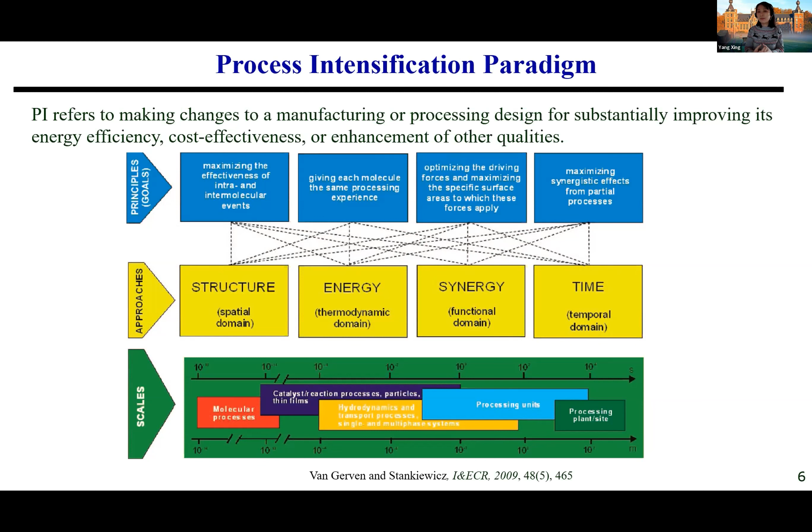Our membrane research is actually sitting quite perfectly along the full scale of the process intensification scheme. From the approach point of view, we also look at the structure, the energy, and synergy between different parameters, and the time as well. This describes very well how we could do membrane-based research.

So what do we do in KU Leuven, our group? We work for HER, which means health, environment, and resource. Basically we focus on fractionating biomolecules, such as antibodies, that can be used as a therapeutic solution. That is linked to the health solution.

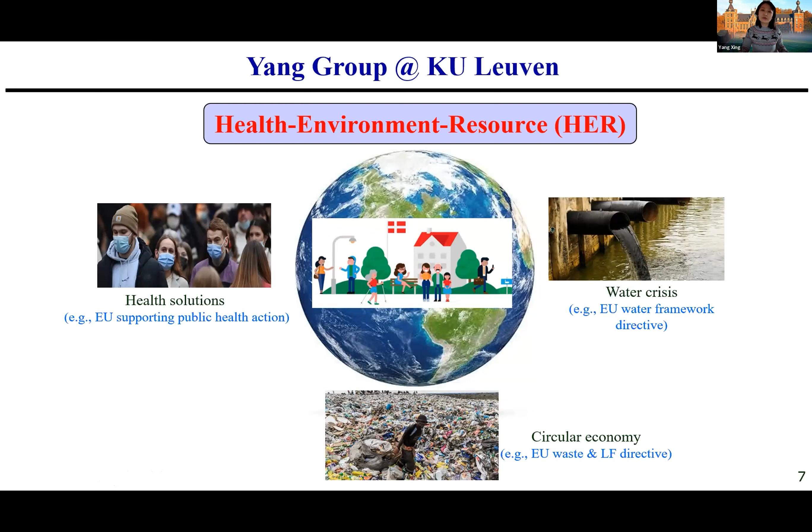We also look at water purification that can help resolve the water crisis issue, recovering valuable materials from there — we are very strong on circular economy. That is also part of the efforts under SIM Square, as I mentioned. We recover battery materials, which is eventually what our efforts are working towards: making our Earth a better living space.

Our research is covered under two umbrellas, two strategic directions in Europe: bioscience and environment, and matter, materials, and energy. We basically use this multi-scale process intensification for system integration and optimization.

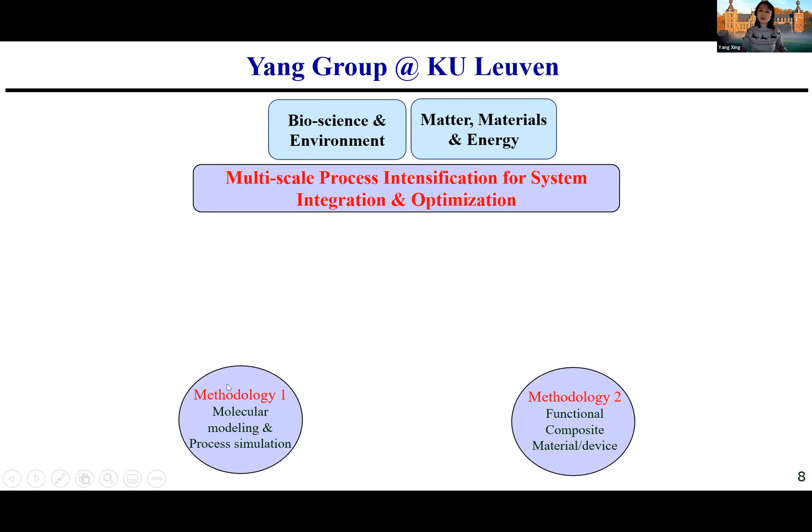We base this on two methodologies, or two toolboxes that we use. One is molecular modeling. Second is looking at the functionality and design, using the functionality of composite materials to actually design a membrane, and also design the separation devices to make them run more efficiently.

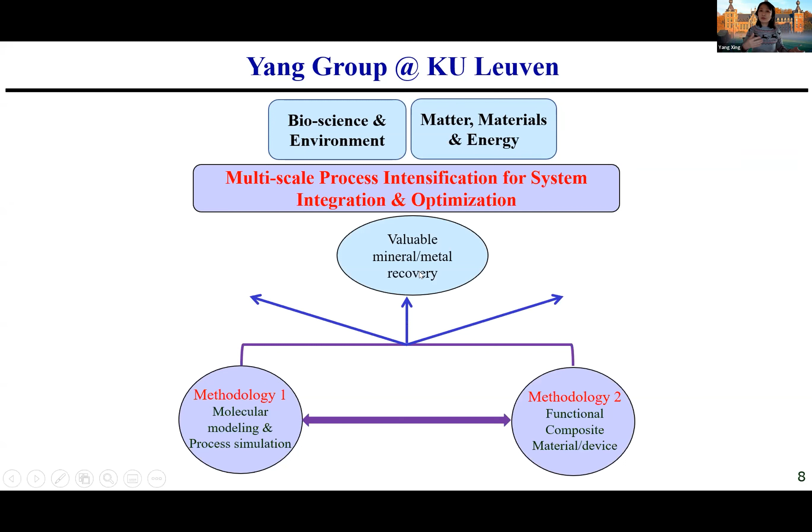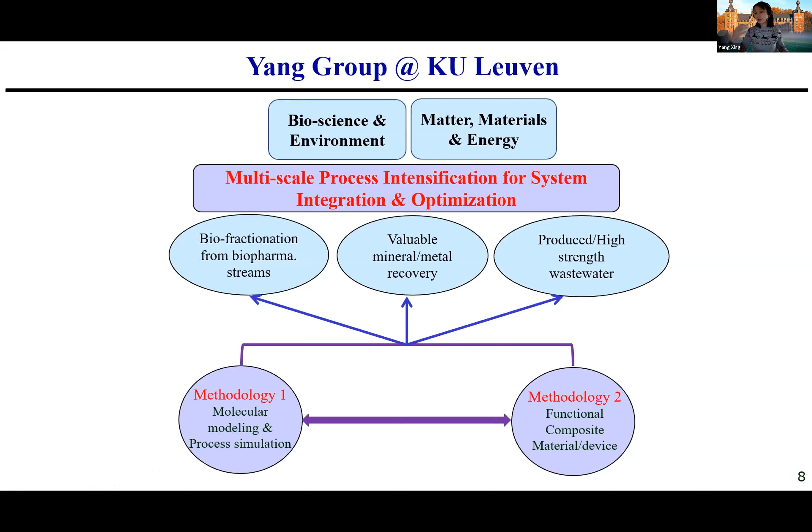So we focus on three clusters, and the first cluster is recovering valuable metals and minerals from natural and waste sources, which I will go a bit deeper. We also look at fractionation of biomolecules from biopharmaceutical streams, and we focus also on high strength wastewater. That again is linked with resource recovery. So we not just focus on purifying the water, but also recovering the values from there.

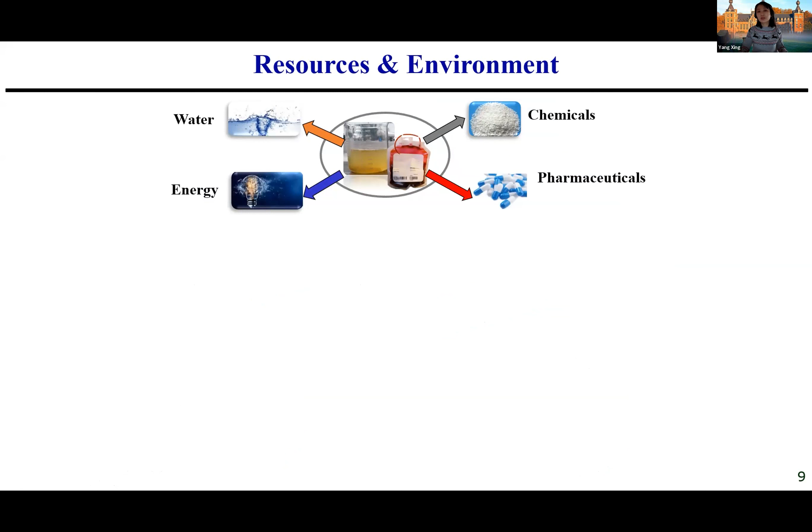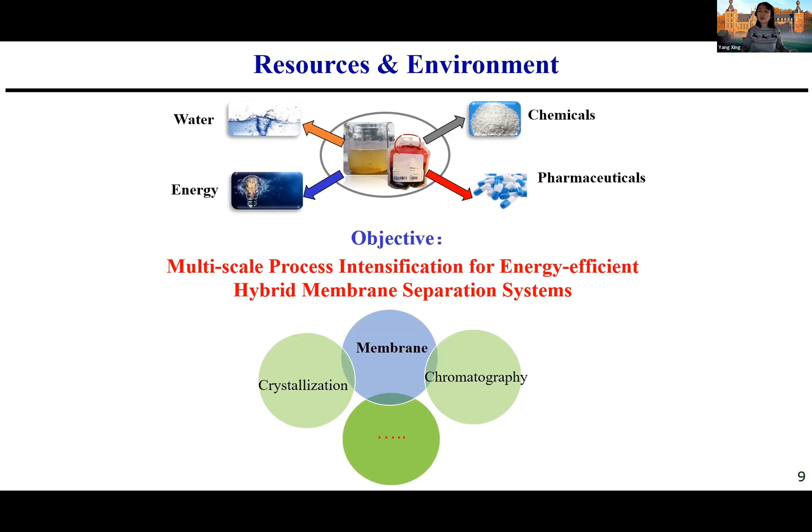As I said, our objective is to use process intensification to see how we can design more energy efficient hybrid membrane systems. As a chemical engineer, we also would not forget about other classical chemical processes. We will hybridize the membrane concept with the concepts of crystallization, chromatography, adsorption, extraction to achieve the separation and eventually achieve purified products. So how do we do that?

Basically, if you look at from the micro to macro level - on the micro level, what we do is use transport modeling to understand what is happening when the solutes transport through the membrane, what the membrane chemistry and surface chemistry is doing in the separation, and also how the micro level hydrodynamics is affecting the micro level transport. So we understand what are the limiting factors in the separation.

We also look at functionalization of the membrane to overcome low effectiveness, and the kinetics and dynamics that affect long-term separation, long-term performance of the membrane. So combining the understanding on those two levels, we can design really efficient membranes, combining the membrane functionality and also the flow dynamics.

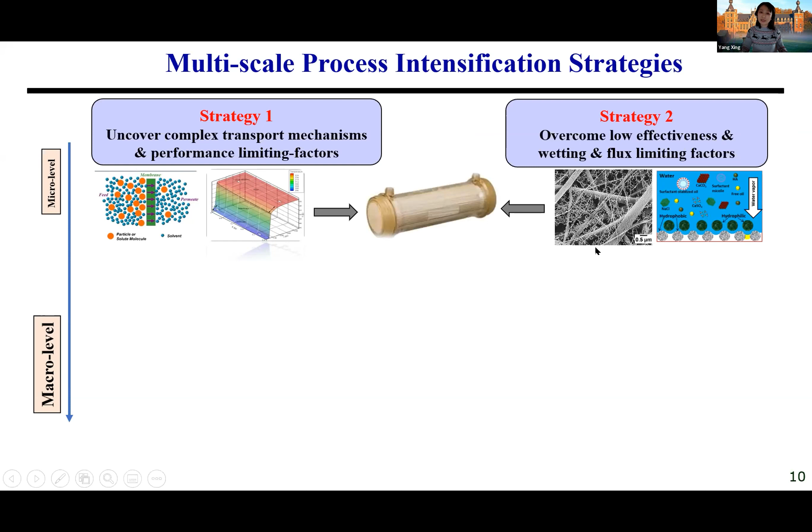On a higher level, we also look at systematic analysis using process simulation to actually design a system that can overcome low energy efficiency and eventually achieve the design of a larger scale system.

As I mentioned, we have three clusters in the group at the moment. So the first cluster is looking into the fractionation of biomolecules. We're looking to purify not just their bioactive components such as antibiotics and proteins and viral vectors, but also harvest them as crystal products. Our strategy is also around three pillars, what we call.

So we look into how we can design the structure, because bioseparation is very different from ion separation - we need very porous structure. We look into the synergy of the structure and the surface chemistry, where we can design very accurate capture and release of the proteins or the biomolecules.

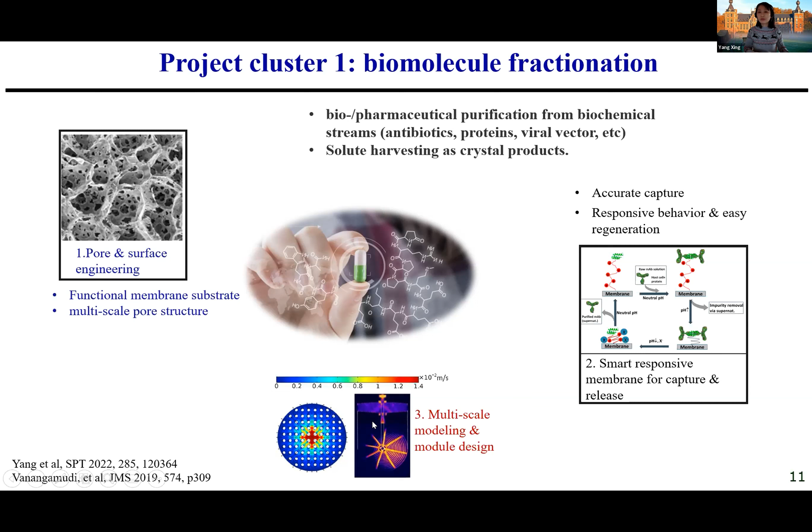And we also build transport models to actually look into what are the most influential parameters, and how we can design the structure of the membrane, the surface functionality, and also the module to achieve the most efficient separation. So these are all very influential factors that we identify.

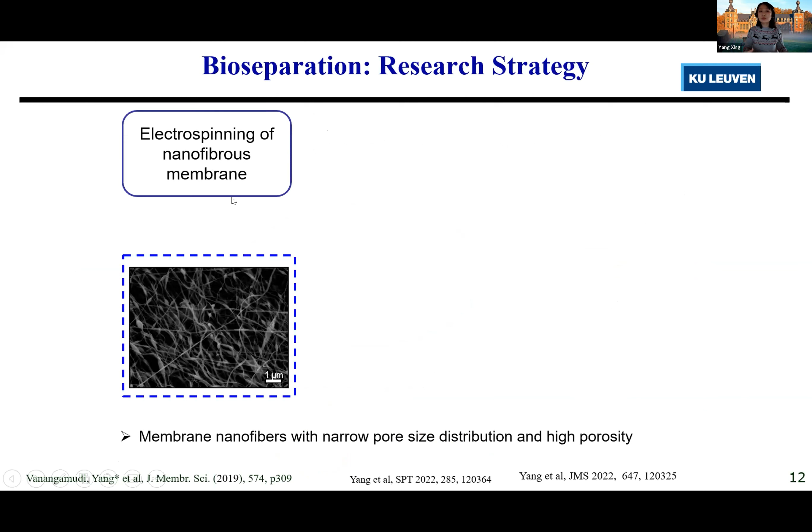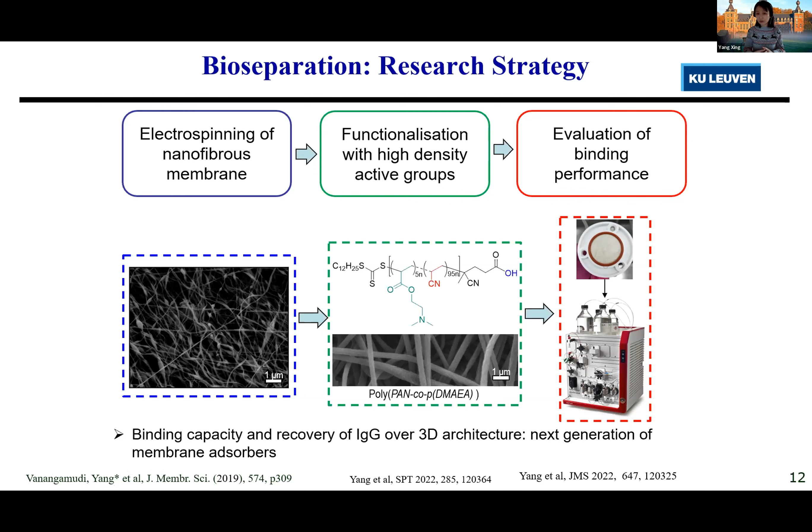So what are our research strategies? In bioseparation, we focus on nanofibrous membranes. We electrospin these membranes and functionalize them to have very high density of active functional groups. Then we also evaluate them in terms of the binding of the membrane towards the bioactive compounds. Our aim is to develop this new generation membrane that can have a 3-dimensional structure with very high binding capacity, which is the current limit.

As I said, we use electrospinning - that's our facility. The reason we use that is because it can be very versatile in terms of tailoring the membrane, not just the hydrophilicity or hydrophobicity, because we need a very hydrophilic surface in this case. We also need very high surface area, because it promotes the interaction of the solids with the biomolecules, and this also gives us very high ligand density - that means the density of the functional groups.

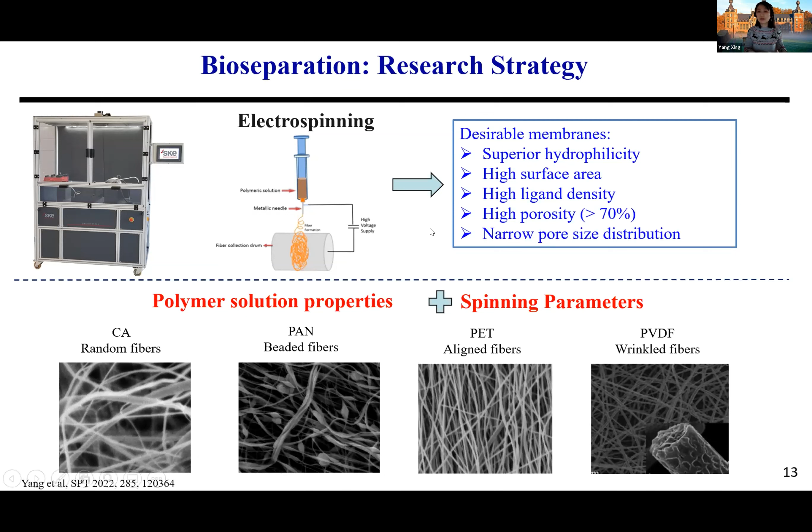So we focus on very highly porous membranes with very narrow pore size distribution, so all the molecules will have equal interaction with the functional groups on the surface. By combining our understanding of polymer solution properties and our understanding of fabrication parameters, we can design a series of morphology structures that have different benefits when treating different solutes or different molecules. So it's a very versatile technology.

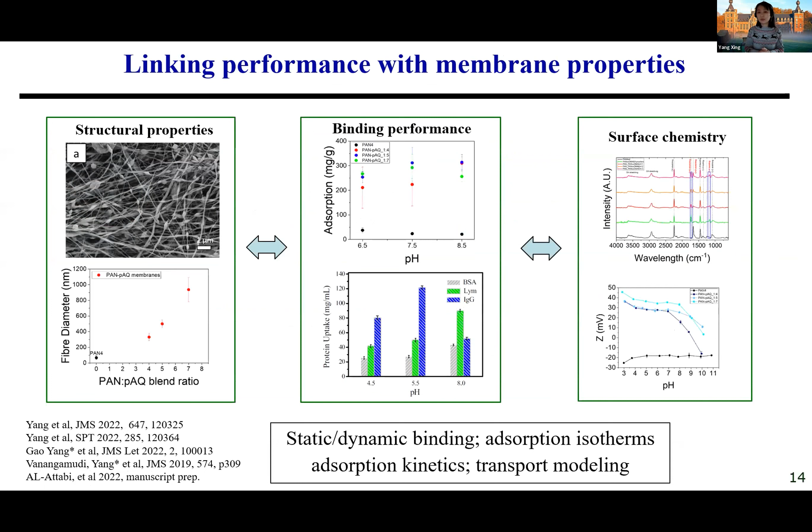In the end, we'll be able to link the performance of the membrane, which is mainly concerning the binding of the biomolecules, with the structure parameter and the surface chemistry. And we also use transport modeling to see how we can optimize these parameters in the end.

So the second cluster we have is about ion resource recovery, where we focus quite a bit on recovering values from electronics and battery waste, as well as toxic heavy metal removal from wastewater. It's a dual purpose research basically.

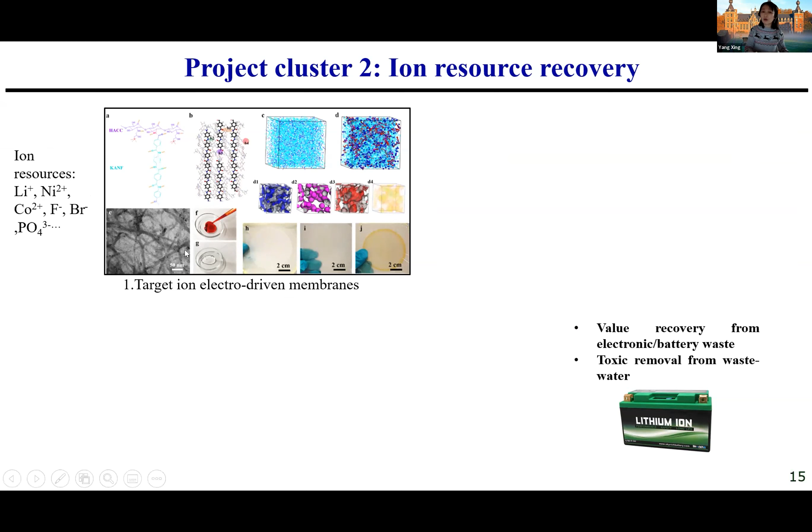So we focus on designing ion selective membranes, not just ion exchange membranes, but ones targeting a certain ion that we are interested in or of value. We also create closed loop processes that can fractionate those ions at very high purity and eventually crystallize them as products, as their solute.

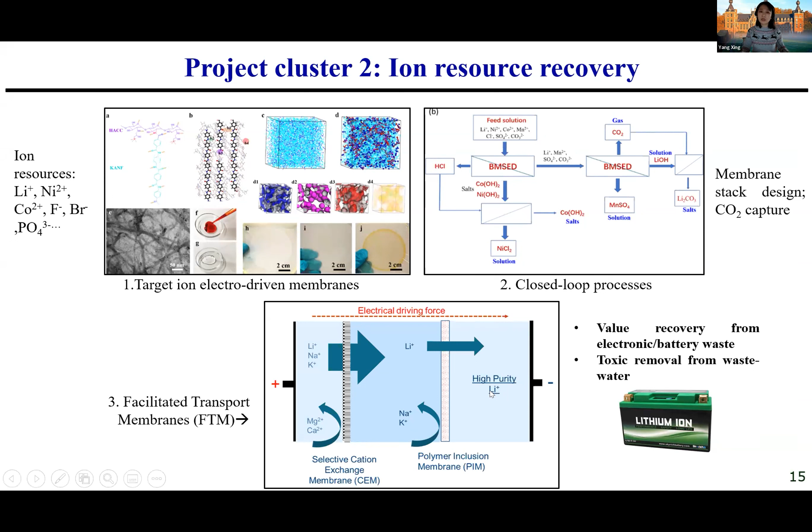Because the throughput of such membranes is always of concern, we look into ways to intensify the transport. We also design a facilitated transport membrane process that combines conventional extraction concepts with electro-driven processes to further enhance mass transfer and reduce resistance.

So we don't just focus on dilute streams, as I mentioned, we also look into solute harvesting and zero liquid discharge.

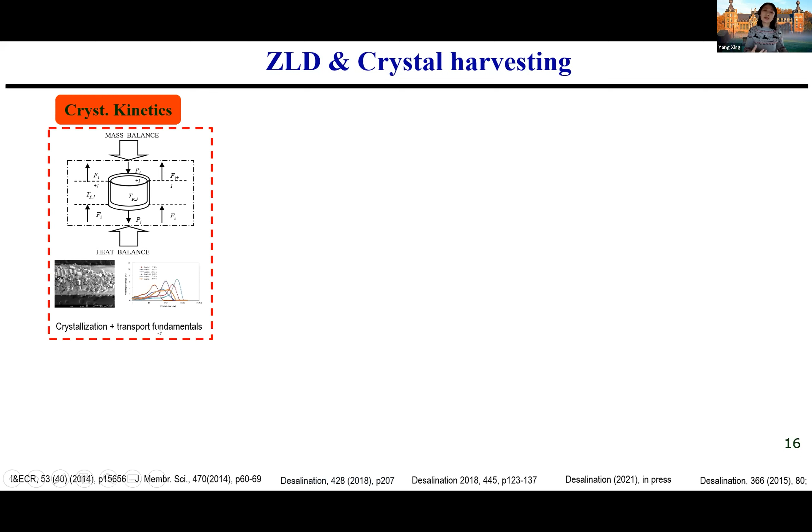In order to do so, we need to understand the crystallization kinetics, right? We need to understand how the synergy of the solute transport or the solvent transport through the membrane has a synergy with the crystallization and also with the hydrodynamics in the system. That is very fundamental understanding that can help us design a better membrane module.

This helps us avoid or delay the occurrence of supersaturation or the deterioration of membrane performance, and we can eventually design continuous membrane crystallization systems using other types of intensification strategies.

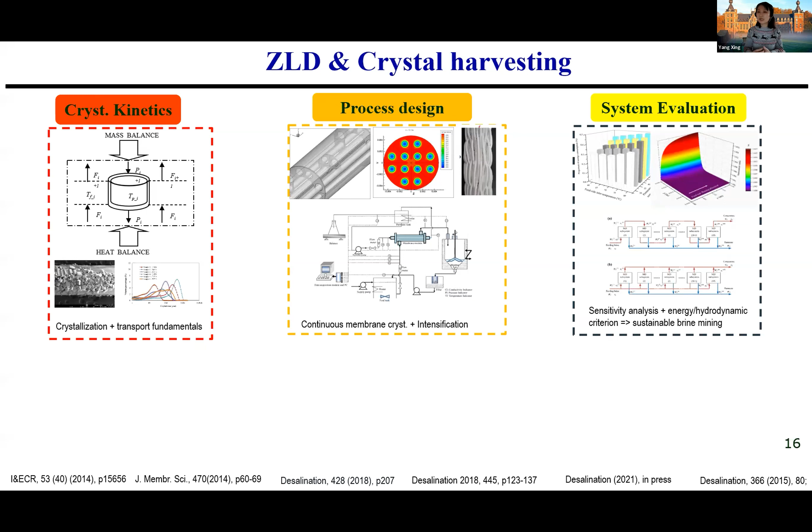So we evaluate the system performance to see what are the most energy consuming elements and how we can tailor the configurations to achieve better energy efficiency. That's based on sensitivity analysis, to achieve sustainable harvesting of the crystals. Eventually we'll be able to deliver crystal products and also recover acids and volatiles.

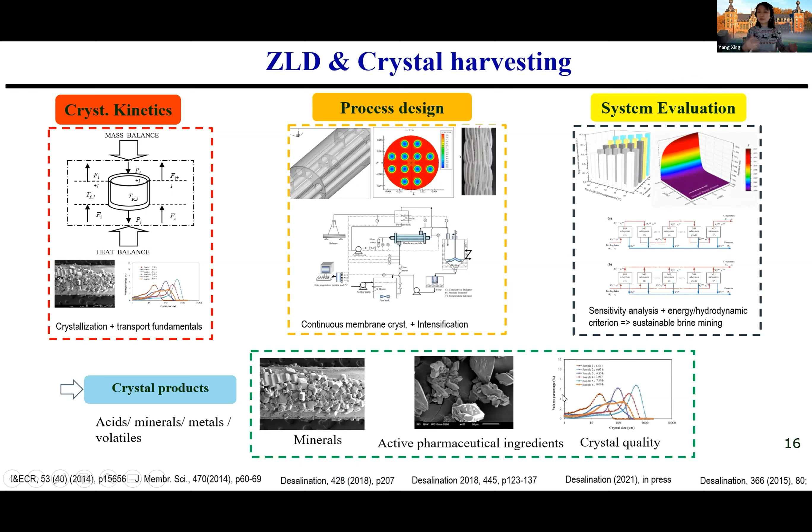For the crystal products we have minerals, and we also work on active pharmaceutical ingredients. The shape of the crystals, what we call polymorph, is also very important. So we evaluate that harvest in terms of crystal quality: size distribution, yield, and shape. These are all very important indicators.

So the third project cluster, we focus on high throughput desalination membranes and systems. My background, when I was at NTU, was focused on membrane distillation for seawater desalination and also harvesting minerals from seawater or brine sources.

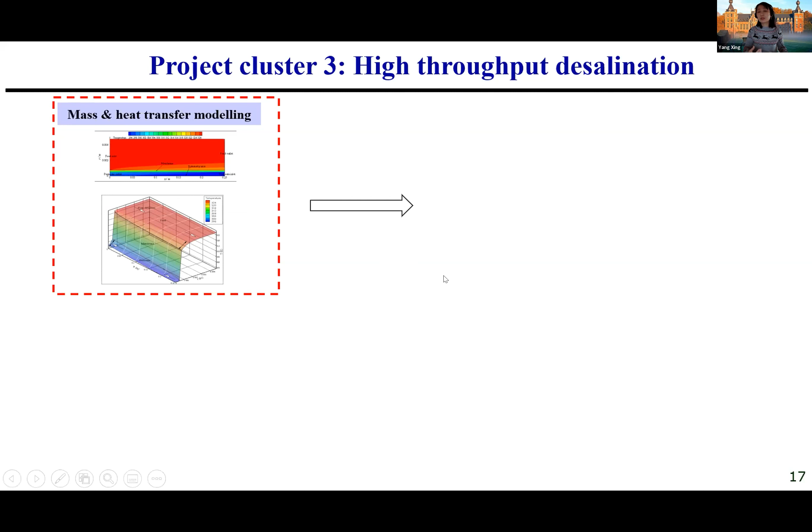My strategy involved a lot of modeling to understand the mass and heat transfer during these processes. Based on our understanding of mass and heat transfer, we know which parameters can be tangibly adjusted.

Based on this understanding, we design high throughput microporous or membrane distillation membranes, not focusing on TIPS or NIPS, which are the traditional fabrication methods. We focus on a combined method called N-TIPS, non-solvent thermal induced phase separation, which can create a very asymmetric structure.

This gives a relatively dense surface layer while having a highly connected pore structure in the bulk, which greatly reduces the mass transfer resistance.

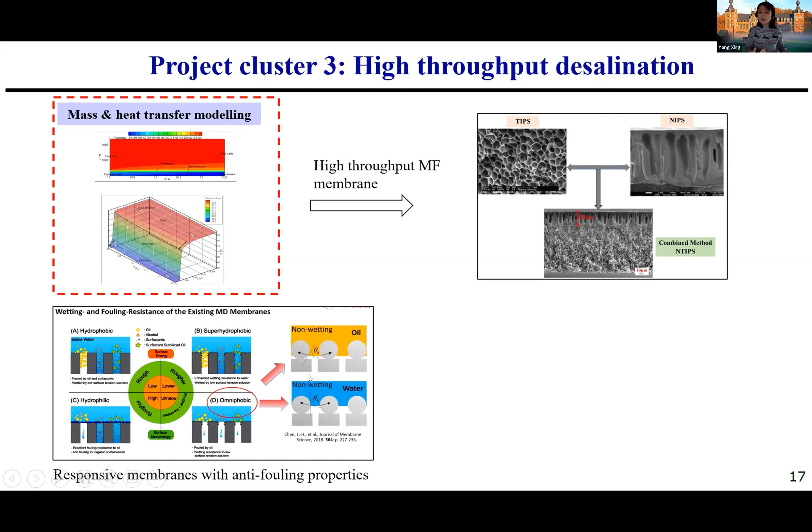Other than that, we also look into how we can sustain this high throughput. We look into strategies that reduce the adhesion of foulants onto the surface using responsive chemistry. We also look into reactive or surface chemistry that can actively reduce the attachment of foulants.

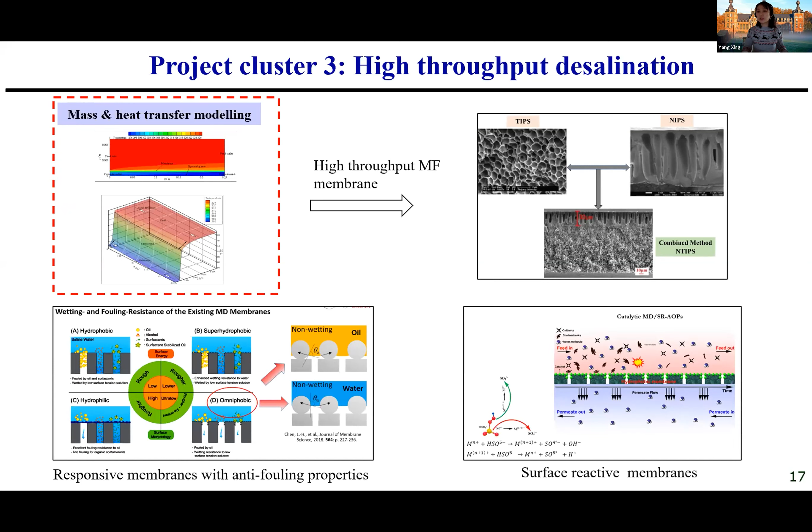So in overall, this is to enhance the separation and sustain it in a high throughput state. Now I would like to briefly go through the 3 generations of high throughput MD membranes that we developed under the N-TIPS method.

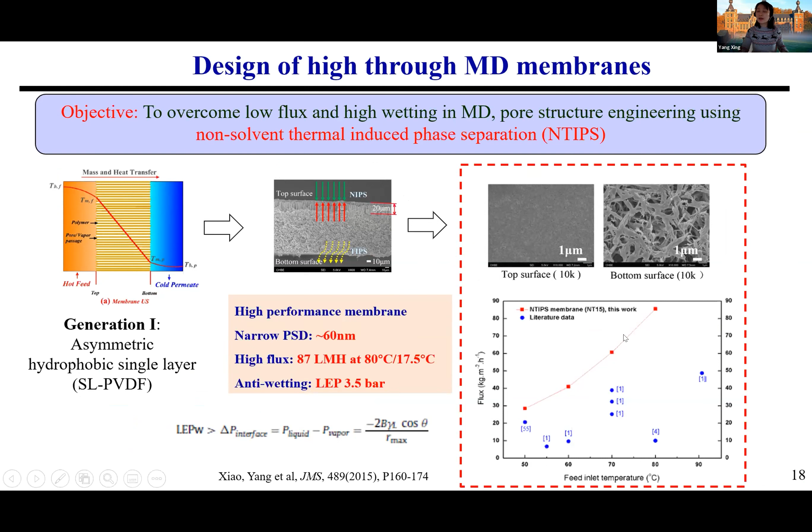The first generation was the basic one: a single layer asymmetric hydrophobic membrane where we create a very asymmetric structure that gives a very high liquid entry pressure, because wetting is a big issue in membrane distillation, and we were able to achieve very high permeability compared to literature at that time.

And the second generation looked at the trade-off between heat and mass transfer in membrane distillation, which was really bothering everyone.

So we design a dual structure where we have a hydrophobic layer that can resist wetting and suffice the principle of membrane distillation. We also have a hydrophilic layer that can trade off or offset that loss of conductive heat.

And then based on this principle, we designed this dual structure that could minimize the mass transfer resistance and achieve very high permeability, even more than a single layer, much higher than a single layer.

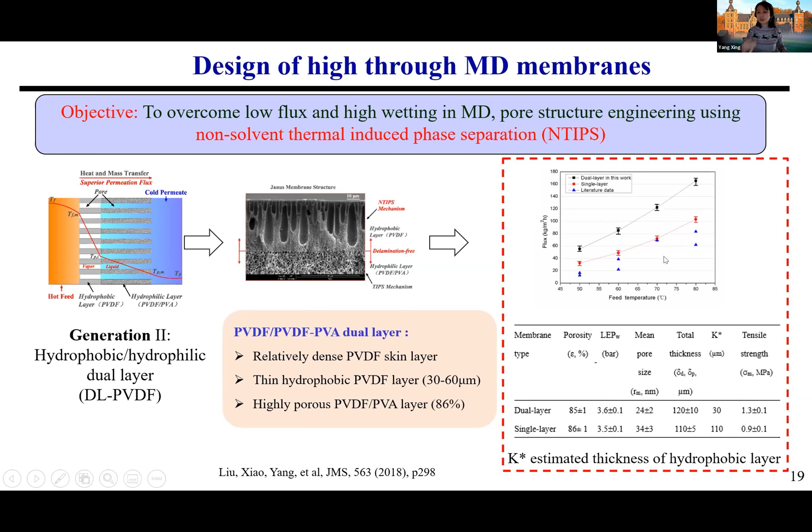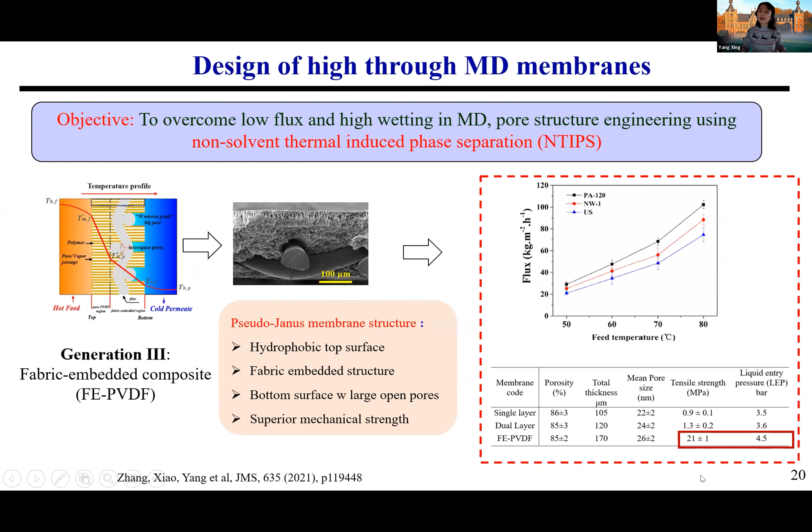So the third generation, we focus on improving mechanical strength while keeping the high permeability. What we do is design a pseudo-Janus structure that has a very thin hydrophobic layer and also a pseudo-Janus support layer that is embedding the fabric. In the end, you're able to reduce the mass transfer resistance while increasing the mechanical strength to more than 10 times the conventional type of membranes.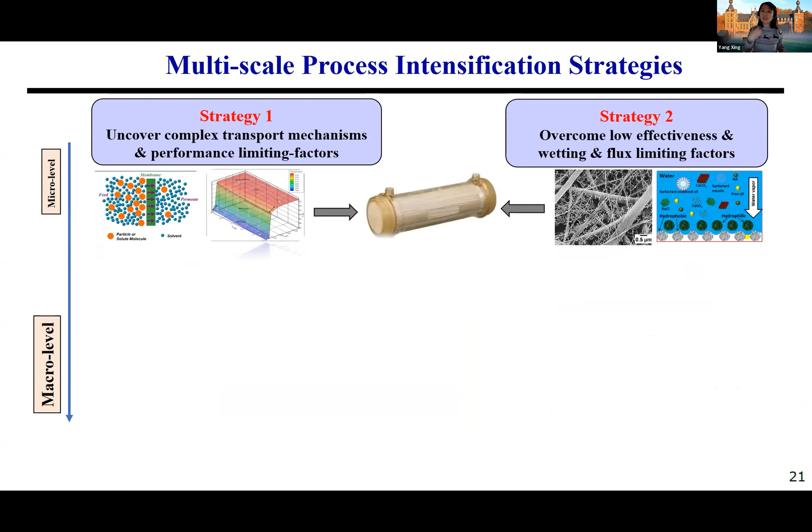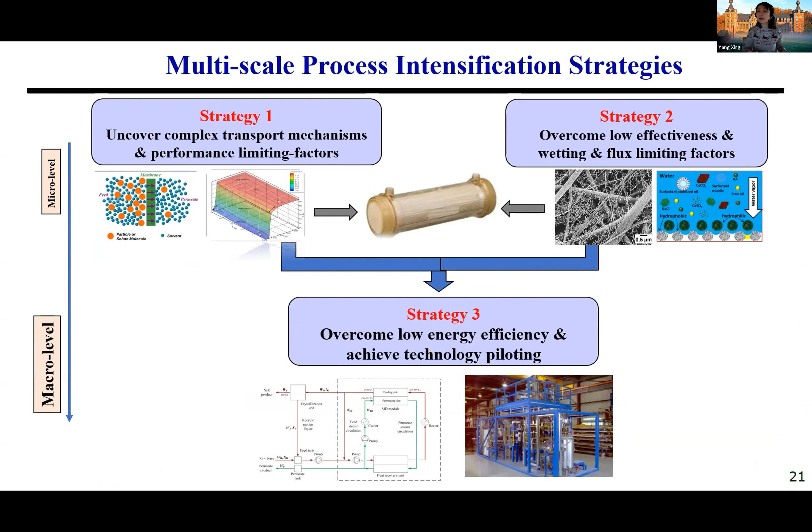Overall, I'd like to share about 3 research clusters that we have, and the idea behind them is we use the multi-scale process intensification strategy to guide everything. Basically, it's coming from how we understand the transport mechanism and translate that into tangible separation indicators and design parameters that help us design better systems.

So, all in all, our perspective is that transport modeling can be a very important tool to understand the performance limiting factors in mass and heat transfer in membranes, which is particularly relevant to many membrane processes, and this can be translated into tangible membrane properties, as I mentioned.

So micro to milli-level PI strategies can be applied to manipulate the membrane structure and chemistry design, to control the interaction of solids and manipulate the interactions between solids and membrane surfaces. However, the synergy between the micro level and macro level fluid dynamics, and how it influences throughput and the interaction of solids, is yet to be identified. This is an area that could be further studied.

On the system level, PI strategy can also assist in how we design system parameters, how we design modules, or how we design the system as an integration, as integrated units, to improve energy efficiency and produce more controllable process routes. For example, we can control crystal forming in a certain way, in a certain polymorph, without interrupting the quality of the crystals.

So firstly, something about the Singapore Institute of Technology. Different from KU Leuven, Singapore Institute of Technology is quite a new university. KU Leuven has a very long history, but SIT has only about 10 years of history. It became the 5th autonomous university of Singapore in the year 2014, so it's actually less than 10 years from then until now.

For this new university, there are a lot of things happening. The positioning of the new university is focused on applied learning. SIT's vision is to be a leader in innovation, leading by the integration of learning, industry, and community. So we focus on applied learning as well as applied research, which means we work very closely with industry to solve the present and current issues that industry partners may be facing. We have a lot of collaboration with different industrial partners.

If we have any issues or things that we want to solve at the moment, SIT will provide a lot of opportunities to help us collaborate to solve the issues at a fast pace. Then regarding the areas that we have, the cluster that I'm in is the food, chemical, and biotechnology cluster.

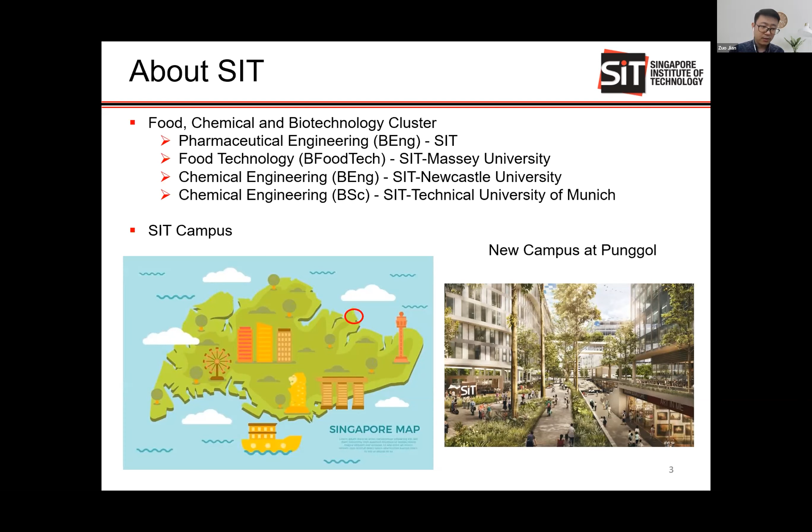So with that, I'd like to move on to talk a little bit on the topics of today. We'll talk about water and resource recovery. Water and resources are quite closely linked together.

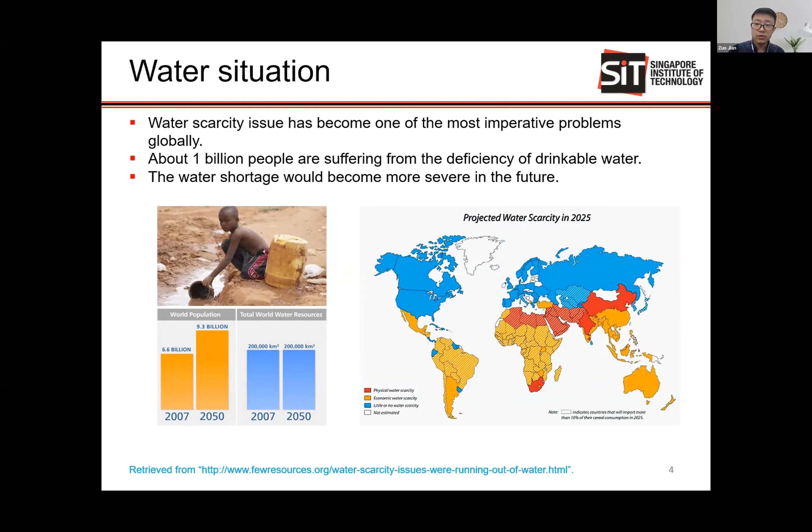So for water, let's take a look at the water issue currently. Water security and scarcity has become one of the major problems. Around 1 billion people are suffering from the deficiency of fresh water. This issue will be intensified because of industrial developments and the increase in population.

How do we deal with the water issue? We need to have different sources of water. For example, in Singapore we have 4 national taps that provide water for the water demands, which includes importation from nearby countries, natural reservoirs, the NEWater system that reclaims water from domestic wastewater, and desalination plants where we recover water from seawater.

However, with increased activities in the economy, water demands are going to increase sharply. To ensure water security, we need to diversify our water supply. So in addition to this, we should think about whether there are other sources for water.

For example, industrial wastewater. Currently the industrial wastewater recovery rate in Singapore is rather low. Most industrial wastewater is not recovered, and is sometimes sent to incineration, sometimes treated and released.

Then the other one is the reverse osmosis brine. The reverse osmosis brine has already been treated through all the previous steps of pretreatment, so we've already spent the effort on pretreatment. Can we still recover something valuable, some more water, from the brine? So these are some potential resources of water.

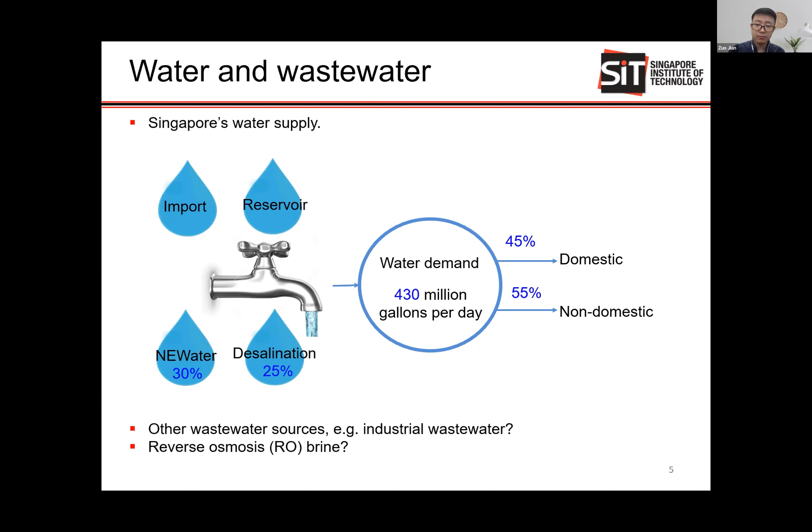In addition to water, these resources can also provide opportunities for resource recovery. For industrial wastewater, many industrial wastewaters contain metals, like in the petrochemical and pharmaceutical industries. They use a lot of metals, for example in catalysts — platinum and palladium are the most commonly used catalysts for chemical reactions and for the synthesis of pharmaceutical compounds. After the catalyst is used, it ends up in the wastewater stream.

Then how do they deal with the wastewater? If it's directly thrown away, it's a waste of precious metal, and on the other hand it will also cause contamination to the environment. So currently we are collaborating with the pharmaceutical industry, trying to recover precious metals from their wastewater.

Of course, membrane technology is one way. We need to combine membrane technology with other methods to come up with a package solution for the recovery. So this addresses both the recovery and the environmental issue.

Similarly, for reverse osmosis — the reverse osmosis brine contains a high concentration of NaCl, and the management of the brine is currently an issue. One way to use the RO brine is to produce caustic soda.

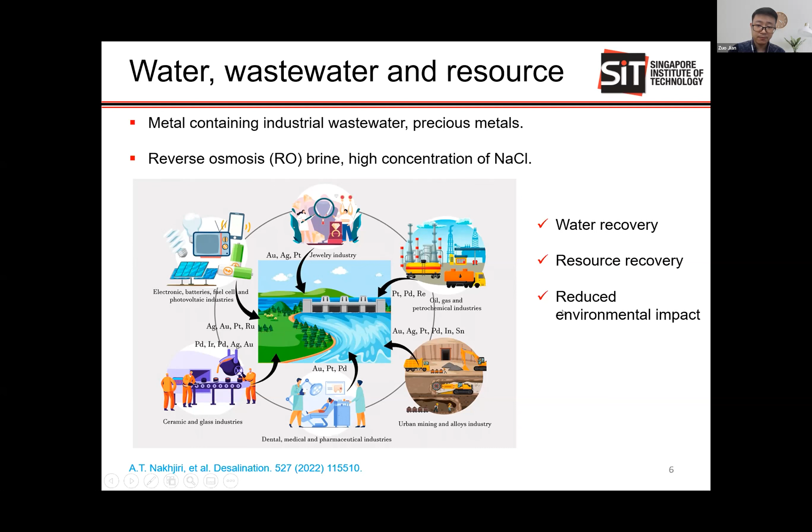However, the majority of the RO brine is still released back into the marine environment. This causes imbalance in the marine environment, so the ecosystem probably will have some disruptions. In order to solve this issue and get resources and water out of the wastewater streams, we are focusing on three things: water recovery, resource recovery, and reducing environmental impacts from these wastewater streams. So how can we do it?

There are many technologies, as we mentioned. Here we want to focus on one of them, which is membrane technology, because membrane distillation technology has quite a few advantages compared to other technologies.

It has mild operation conditions, meaning it doesn't have any pressure requirements. The temperature is in the range of 50 to about 80 degrees, so mild temperature, with 100% rejection of the solute, so that after treatment the water from the permeate will not contain any heavy metals or precious metals, and can be released, disposed of directly, or reused and recycled.

It's also not limited by the source concentration. We can concentrate the source to a very high concentration, even near saturation points, so the osmotic pressure of the source solution is not the limiting factor. And it has the ability to couple with low-grade heat because of the mild operation condition.

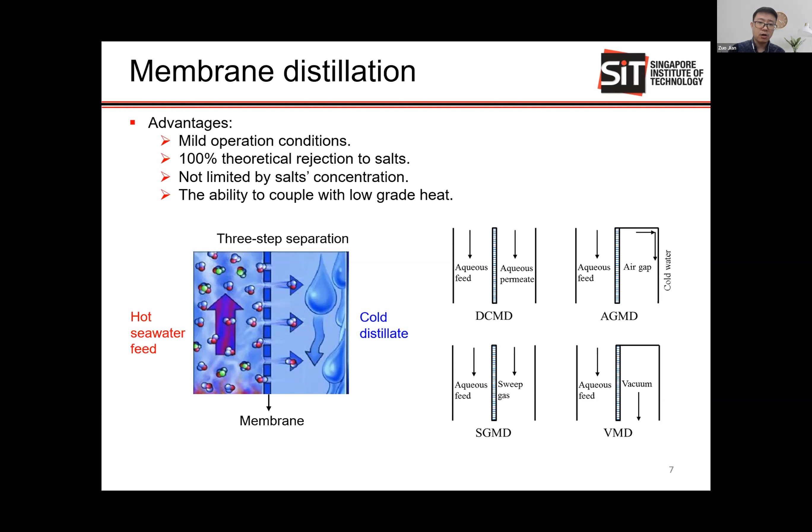And of course, this technology also has its own disadvantages. One of the major disadvantages is the energy requirement — currently the MD process is still an energy-intensive process.

So to solve this issue, we have different directions to work on. One is to work on the process design and process integration, so that we can have better process control to recover the process waste heat.

Then on the other hand, because of the mild operation condition, we can also tap on waste heat or waste energy. One example is the cold energy from the LNG, liquid natural gas gasification process. This energy can be used to cool down the water in the permeate, so that we can receive the water vapor from the feed solution.

Then for the hot energy, we can also tap on solar energy, which is used to directly heat up the feed solution. The efficiency for doing this is much better than converting solar energy into electricity. So we get higher efficiency using it for direct heating. These are the ways that can help reduce the energy consumption of this process.

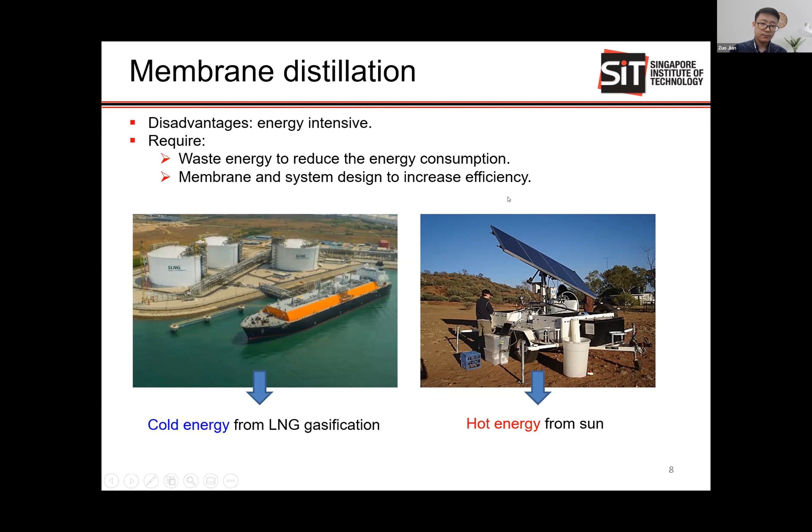The brine will be directly used. In this case, we are using real seawater brine collected from local desalination plants. After the process, the products will be just clean water and sea salts, with a tendency to push it to zero liquid discharge.

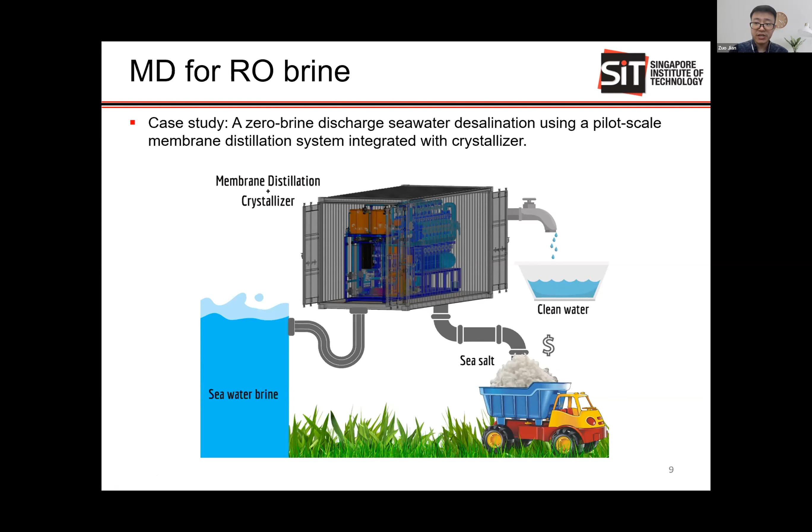The membrane is one of the key parts of the membrane distillation process. For this particular project, we are using the commercial STOMATE hollow fiber membranes, provided by Memsift Innovations, a company working in the MD and zero liquid discharge area.

It is a startup company in Singapore. We are working very closely with the industry, as well as closely with Memsift, for the collaboration.

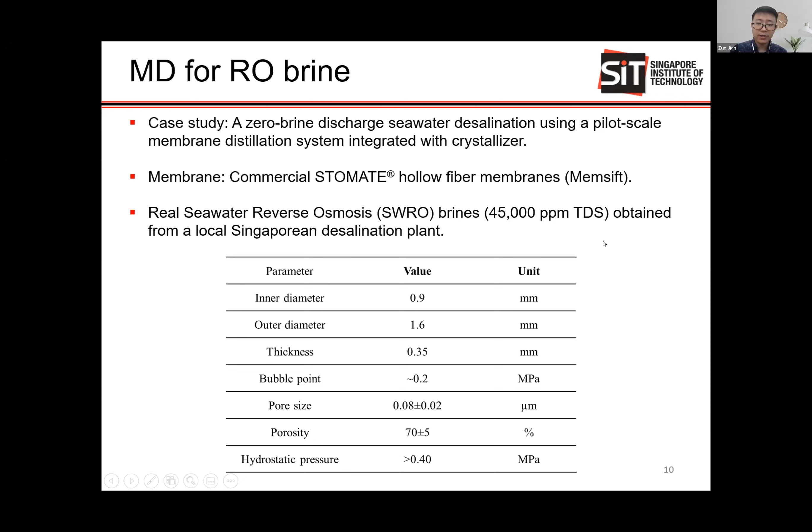For the seawater, as we mentioned, it is directly collected from local plants, which has total dissolved solids of about 45K ppm.

Firstly, we have done quite a lot of analysis and characterization for the membrane that we obtained from Memsift, for example morphology study, pore size, porosity, and tensile property study. Here I want to show one of the studies on morphological stability.

The morphological stability study involves immersing the membrane into different pH solutions to test long-term stability. This study is important because in the future, in the actual process, we probably need to use acid or alkaline conditions to clean the membranes, so the membrane needs to withstand a certain degree of these solutions with good stability.

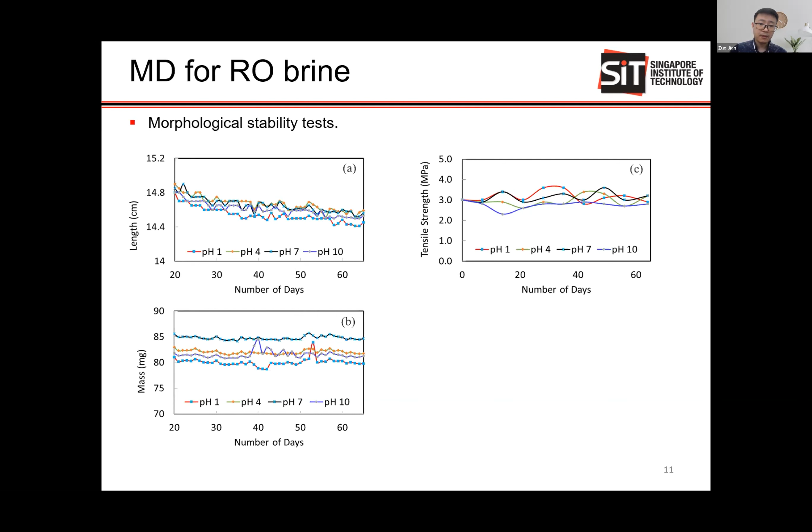This low vacuum is normally used in industry to save energy. We don't want to pull it down to a very high vacuum like in the laboratory, since that is not efficient in the industrial process. For the cooling water, room temperature cooling water is circulated to do collection on the permeate side after we've pulled it down from the membrane.

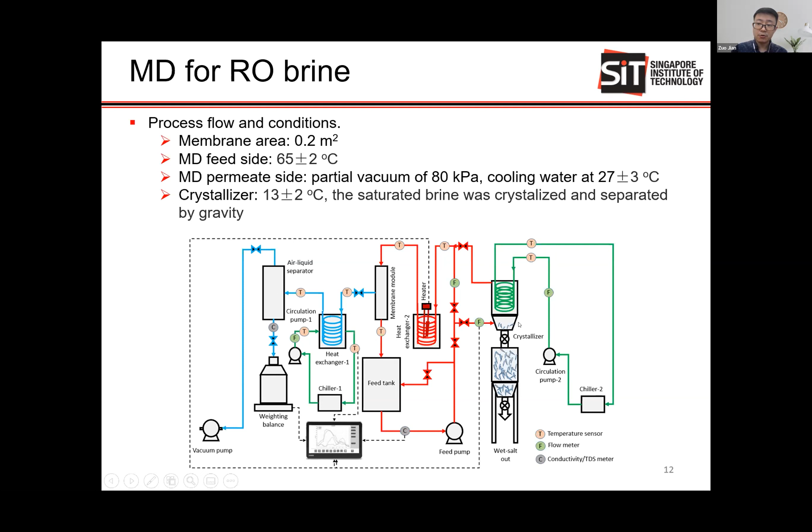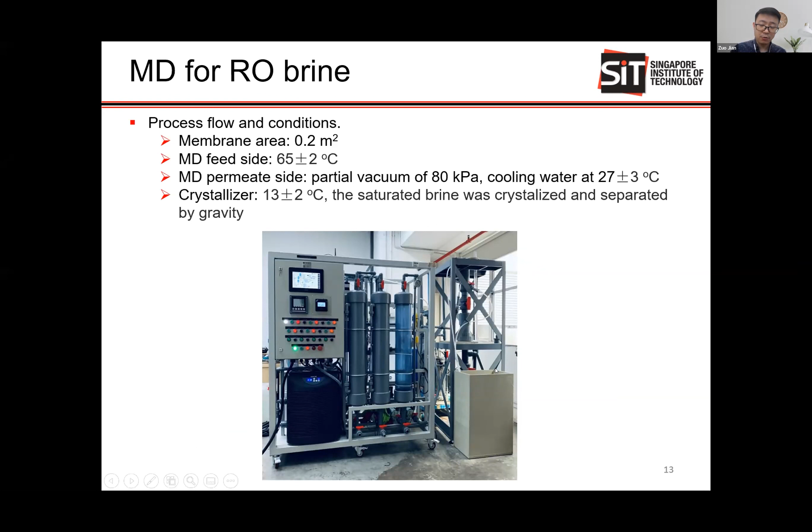And here shows you the actual pilot scale equipment. On the left-hand side we have the membrane, and on the right-hand side we have the crystallizer.

For the process, we tested it for 280 hours of operation, with data collected hourly. Due to safety reasons, the operation is in the daytime, about 8 hours a day, then stopped during the nighttime. We also designed a simple rinsing protocol for the membranes: at the end of the day, the membrane is immersed in just tap water for a few minutes, then plugged back into the system.

For the entire duration of the process, about 280 hours, the average flux obtained is around 3.7 liters per meter square per hour. We do not see any net change or fluctuation in the flux, which shows the stability of the membranes—no sharp decrease or sharp increase.

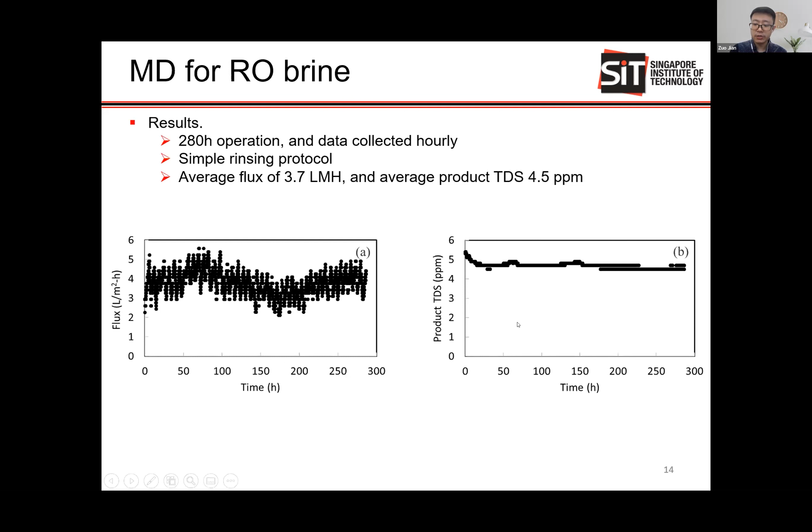From the product TDS, we also observe the stability. The TDS is always below 5, which means the product meets the WHO requirement of smaller than 500 ppm. So the produced water is actually fresh water.

We also like to compare the energy efficiency by calculating the actual flux versus the theoretical flux. The theoretical flux is calculated based on 100% energy recovery efficiency. However, as we can see, the theoretical flux is always larger than the actual flux, because we cannot achieve 100% energy efficiency.

This helps us see how the energy efficiency varied along the operation. On average, we get 62% energy efficiency, which is reasonable for a process without any energy recovery system. When the actual flux decreases, the energy efficiency also decreases. This is very important in process design, because if the membrane is not stable and the flux varies, the energy efficiency is also sacrificed.

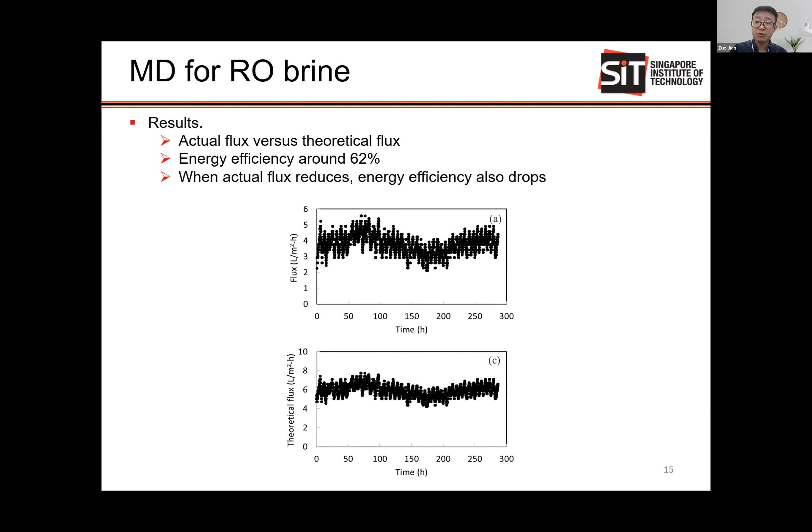To increase the energy efficiency, we can use different methods. We can have a method to prevent heat loss, and we can integrate a heat recovery system design.

Here is one method to do the integration for the heat recovery design, to recover energy from the permeate side. If we consider this recovery during the calculation, we can increase the GOR, gain output ratio, of the entire process to around 2, just from this one step of energy integration.

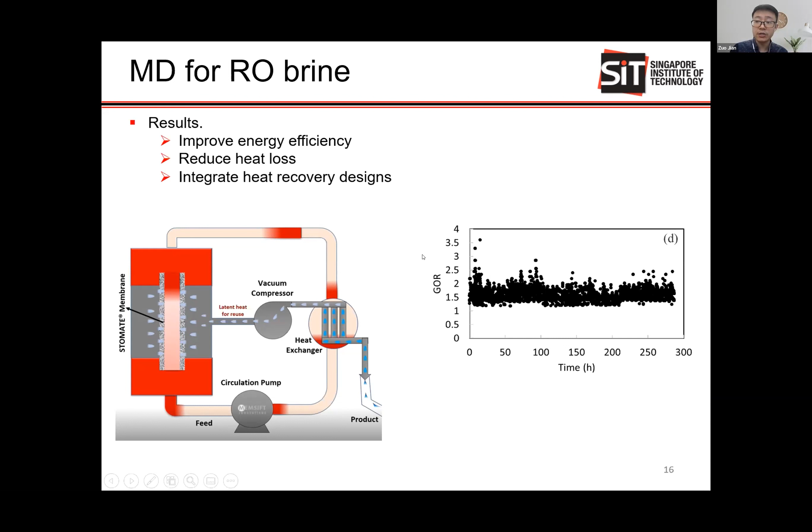Lastly, after the entire process of concentration, the feed water is concentrated to around 200 ppt, which is close to the saturation point already. We have also collected the kilograms of the salt, which is a wet salt.

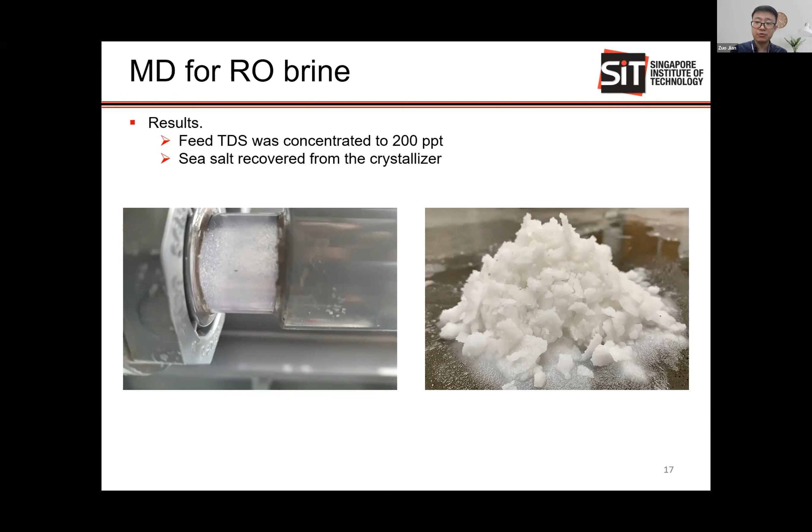This entire process demonstrates that the membrane distillation integrated crystallizer has the capability to continuously produce water and resource at the same time, pushing toward near zero liquid discharge status. Due to time limits, I will not go into more details on that.

Just a short conclusion and prospects: from this pilot scale design, we have demonstrated the capability of using MD for water and resource recovery. However, there are still improvements to make, such as process design for energy recovery, to achieve a more energy efficient process.

The potential for this process is not only limited to RO brine, but can be extended to the recovery of other precious metals from other types of wastewater solutions. We are also working on extending this to recover resources from pharmaceutical wastewater or other industrial wastewater.

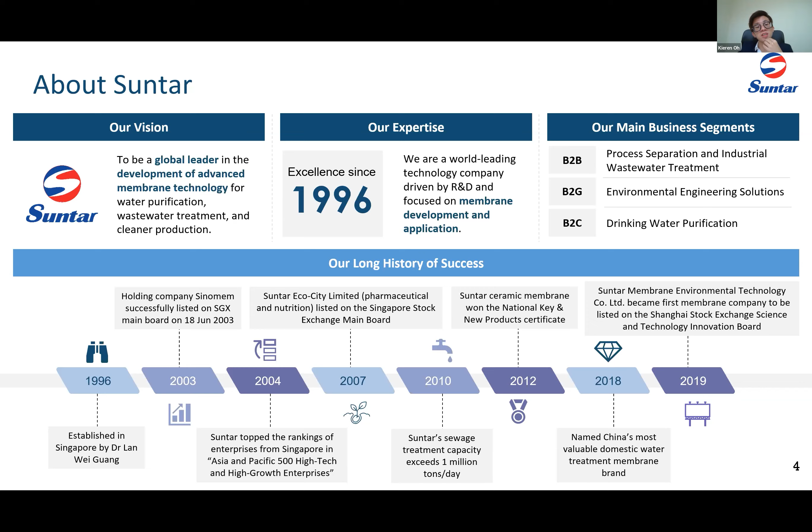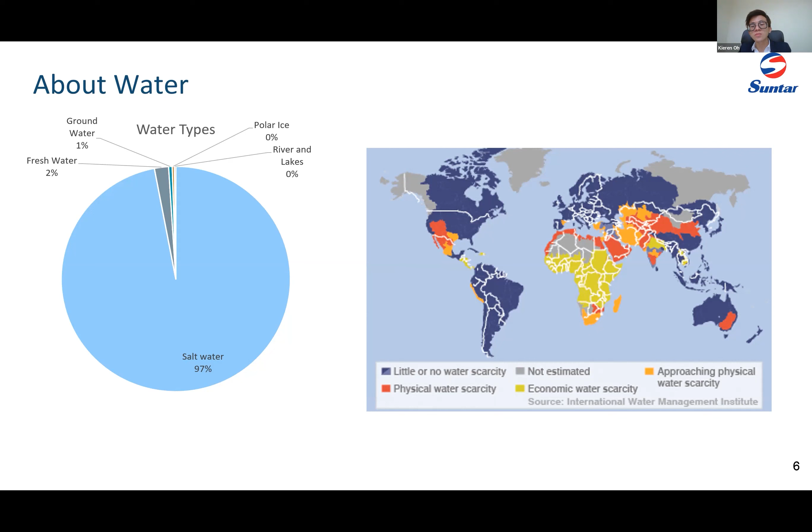So let's move on towards the global trends of water treatment. Something very fundamental is the water types. If we look at this, there's only 3% of water that we can really use, because the other 97% is salt water from the sea. And if you look at the spread of water scarcity around the world, we suddenly realize that although water is very available in Singapore, and to us just on the tap we have a very stable source of water, in fact water scarcity is really spread out throughout the world.

If we dive a lot deeper into that, we can see that if we look at annual discharge, industrial and domestic, we are looking at something near 359 billion cubic meters a year. And of these 359 billion cubic meters a year, only 52% of the discharge is being treated. So there's still a huge gap of water treatment around the world.

So if we look into the discharge and how it's being treated, a lot of things will start to show up: biologics, the use of bacteria to break down COD and BOD; your membranes, to mechanically and physically stop the contaminants from passing through; and then chemical reactions, where we use some chemical properties like the solubility constants to remove the contaminants.

So if we're going to look worldwide and global, we start to see some of the law implementation and how it affects the global trends of water treatment. So in 1972, the US released the Clean Water Act of 1972. This is actually the start point of people looking into more wastewater treatment, and how we are going to reuse the water.

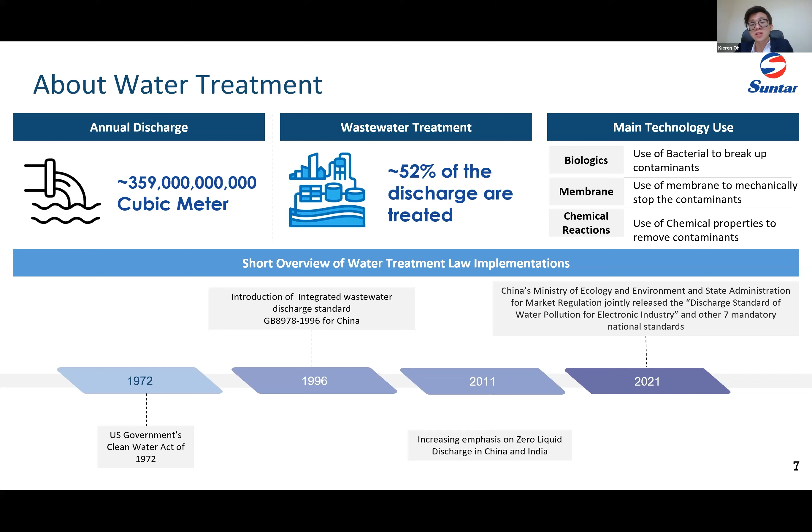So when we look into sustainability and why the governments are doing this, we actually see that this is just to reduce the amount of waste, to protect the environment, and to create a cleaner source of water for everyone. And if you look into the byproducts, there's also always the production of secondary products there. So what are really the water treatments going on around the world?

First, seawater desalination. This is the act of taking seawater, concentrating the salt in one stream and removing the salt in another, so that this water can be used for drinking. If you think about this, if we are discharging toxic waste from industries back into the sea, and then just taking the seawater for desalination, this creates a lot of trouble for everyone, all the way down to the consumer end.

So look at another arm of it, the municipal wastewater treatment or the industrial wastewater treatment for discharge. Similarly, if we are discharging toxic waste into the environment, this is only going to loop it back to us. So what we are doing is putting in more biological treatment, trying to break down the COD, BOD, and remove some of the toxic waste before it's pumped back into the environment.

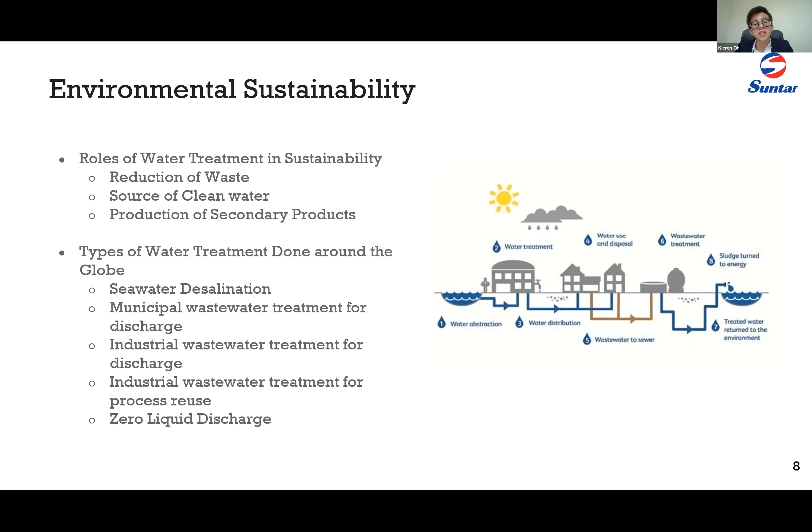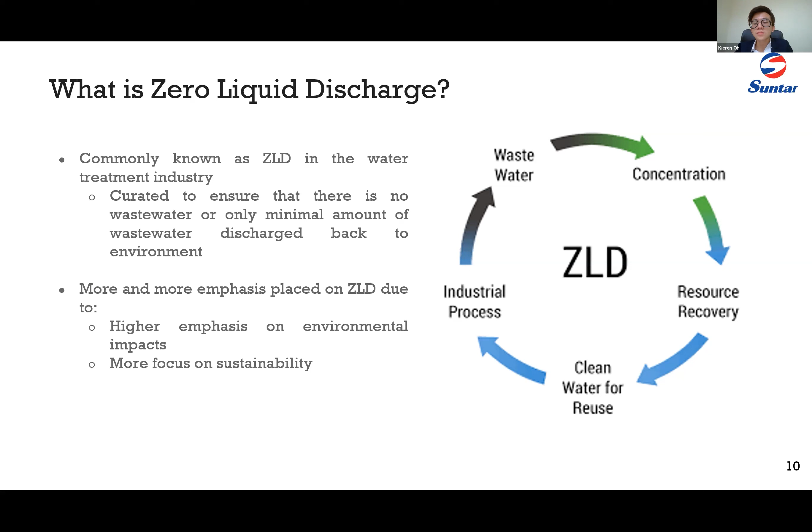So just now I mentioned that zero liquid discharge basically makes use of all the water, putting it back to reuse, and producing no liquid waste, only solid waste. This is a very specially curated process design so that we can minimize the harm that we are putting back to the environment. Right now, because manufacturing and industrialization are getting more and more stable, people are putting more emphasis on environmental impacts and sustainability. That's why ZLD is becoming a more and more popular process that a lot of industries are looking for.

So right now, if we look into zero liquid discharge and how it's being marketed in the industry, we always talk about taking the wastewater, running some minimum pre-treatment so that it doesn't harm the MVR, and then putting it through very energy intensive steps of MVR, thermal evaporator, and centrifuge, so that they can get out the solid waste while recycling most of the condensate for reuse.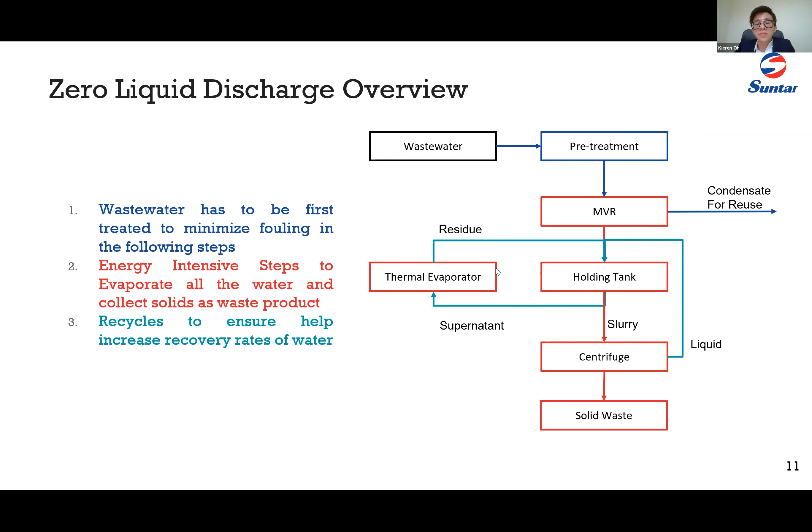So this is a very hefty cost for anyone to start putting this into their own process lines. If I'm going to do so-called zero liquid discharge, taking up 70 kilowatt hours of energy per meter cube of water, buying water is much cheaper than that. And really, does zero liquid discharge give me any market value in there? These are what business owners will start to think about. And the answer is most of the time, it doesn't give a good return on investment. So how do membranes actually come in and help this?

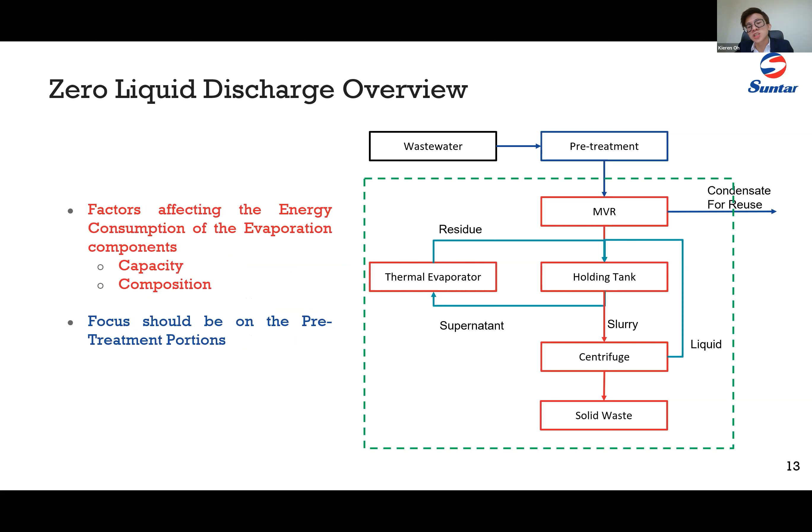So how do actually membranes come in and help this whole process? We start to analyze what are actually the factors affecting the energy consumption for the evaporation components. Is it capacity? Is it the composition? So where should we really focus on to help cut costs on this? To help cut costs on these energy intensive components, we actually need to dive way deeper into the pre-treatment portions. So then we are going to look into something called brine concentration. So how do we really do brine concentration to the extent that MVR will become much cheaper?

So normally when we look at brine concentration, there's a few parameters we are looking at: TDS, COD, hardness, presence of any more toxic metals. So then how do we really stop this?

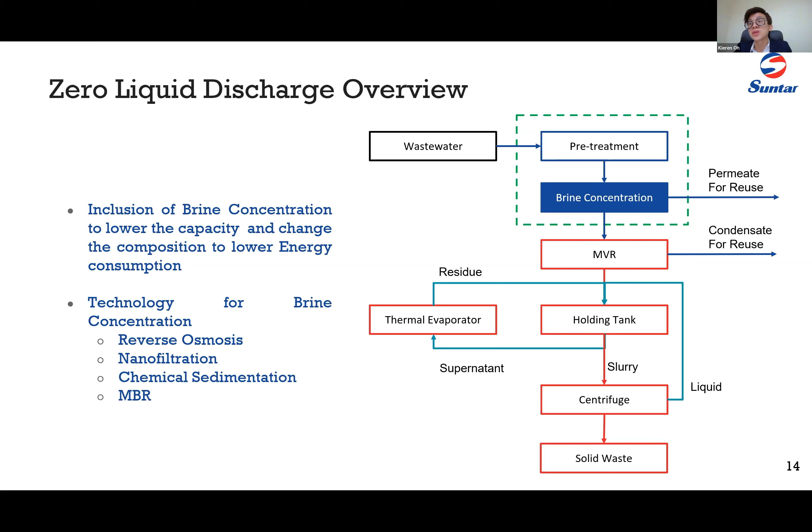So first, definitely reverse osmosis. Then second, nanofiltration, if we are going to look into production of secondary products. So if I want to just isolate sodium chloride from the other salts, nanofiltration will be a good choice. Then chemical sedimentation. If I am looking at some water sources that are very high in concentration of calcium, magnesium, then yes, I need to do some chemical sedimentation, and then we might be able to implement not just a sedimentation tank here, but some more niche type membranes, like ceramic membranes, sometimes used for hardness removal. And then if you're looking at high COD, high BOD, then we need to include things like MBR.

So let me just explain a bit more about how reverse osmosis will help brine concentration. The basic concept of reverse osmosis is basically you're just applying pressure through a membrane. Because the pore size is small, the salt particles, the TDS, tend to get retained back in the reject side, and then water gets flushed through.

So what happens here is if we are going to try to push it to the brink, we can try to get very high recoveries just for the brine concentration. We can get very, very little flow rates for the concentrate side, for the retentate side. And then when we run the retentate through the MVR, the capacity will be much smaller. So what RO actually potentially serves is reducing the water entering the MVR by about 80%, sometimes 90%, depending on what the inlet TDS is, so that we can minimize the cost of the MVR. So sometimes we'll start to look at external loops and internal loops for different stages and different passes of RO, so that we can overall increase the water recovery here.

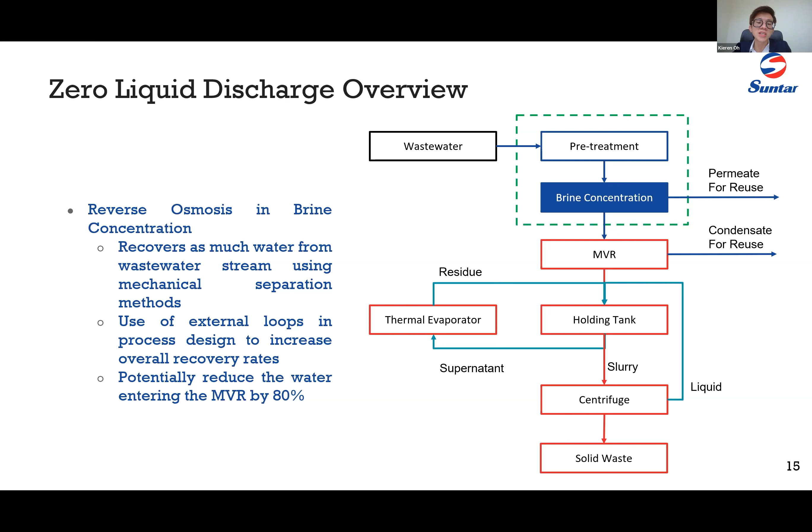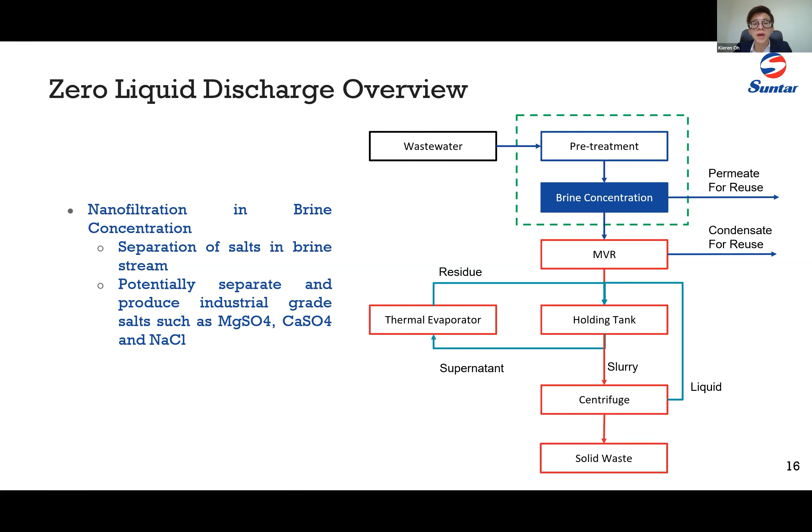So like I said just now, if you're going to look into nanofiltration in brine concentration, when I already concentrate my brine, there's always the salts: sodium ions, magnesium ions, sulfate ions, calcium ions. So if I'm going to use nanofiltration here, then definitely I'm going to stop the magnesium, I'm going to stop the calcium, I'm going to stop the sulfates. Probably only sodium chloride will pass through, or any other smaller molecule, smaller ions. So in this case, I started to look into things like salt separation, byproduct recovery. So in any case, if sodium chloride or sodium sulfates are very expensive in the area, such actions might lead you to an additional source of income.

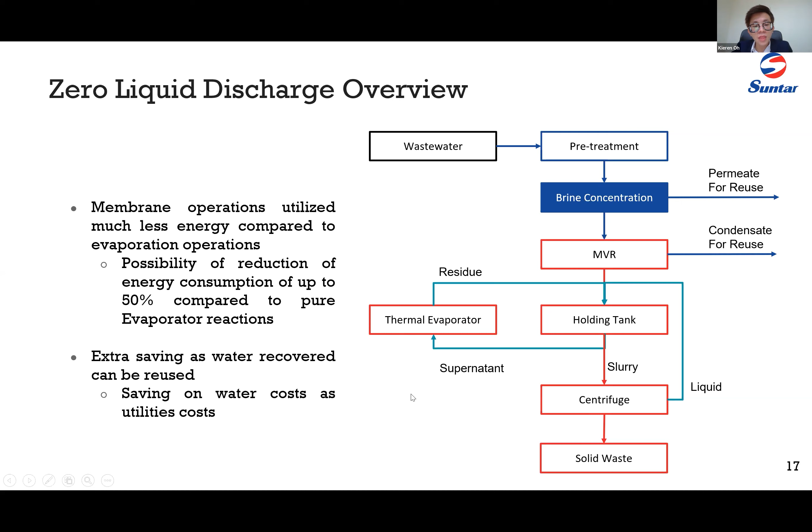So then I mentioned about all these cost savings. So how good does it actually look on the return on investments? This is just one of the rough ROIs that I did for one of my projects.

When we came out with this ROI, we are looking at an evaporator cost of about 1.5 million for this capacity. If you're going to use membranes, my cost is not reducing the initial investments on evaporators, so I'll be dumping in more money for the membrane systems, but we do see a huge cut in operation costs. When we analyze the ROI and the break-even period, it actually lies just slightly after 4 months. It hasn't even reached the 5th year, the 5th month, and we can get back what we spent on the membranes.

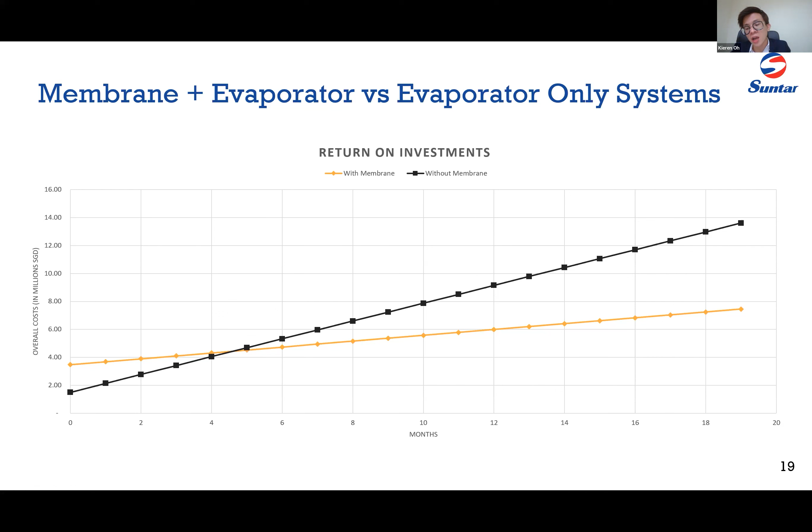And then if you look into the whole systems, including evaporator, how does it look? Systems I've designed have an ROI probably ranging between 3 to 5 years, sometimes even way lesser. This creates a lot of economical impact for any industrialized partners.

So to come back to a conclusion, why people are starting to look into zero liquid discharge more is because more and more people are putting emphasis on sustainability. Water cost is a very huge cost for many industries, as well as the government putting extra pressure on discharge requirements. People are looking into how to reuse water, how to maximize water reuse, looking at zero liquid discharge. And then when they start looking at zero liquid discharge, they realize that, oh, there's a lot of cost just by implementing evaporators.

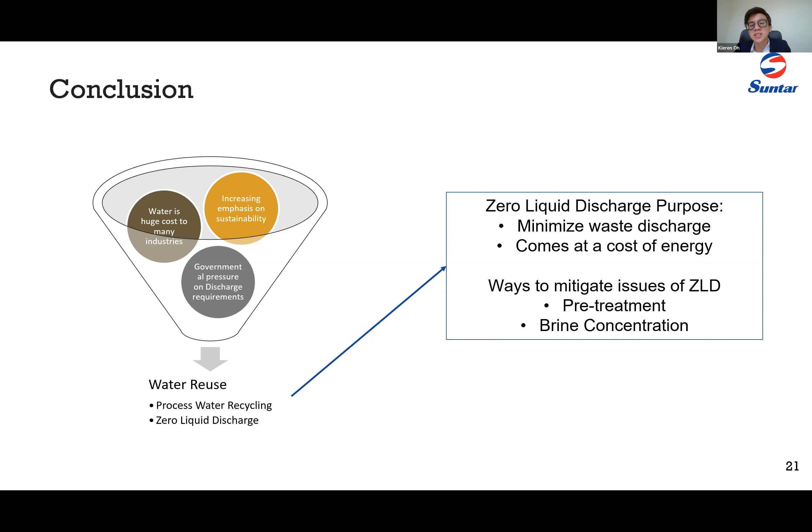So this is where industry partners like the membrane suppliers or membrane designers come in, and then help by saying that, okay, when we look at pre-treatment, when we look at brine concentration, we can actually mitigate a lot of the issues that are currently there for zero liquid discharge. This becomes a very well-rounded process design for anyone that tries to implement zero liquid discharge.

So I guess I can hand back the time to SG Mem.

Yep, I guess that's all from me.